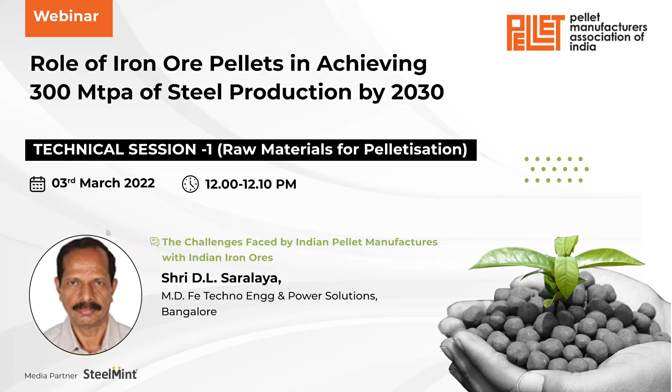Our next speaker is one of the top people from our pellets industry. He's a consultant, Mr. Saralaya. His name is Mr. D. L. Saralaya.

So I would really welcome if our friends from America, they continue to be with us, and we will be very, very delighted, in fact, and we will be very grateful. I know United States is one country, my daughter is in Denver also, that they don't like to talk after office hours about business. But Indians are different, and I am sure you will agree.

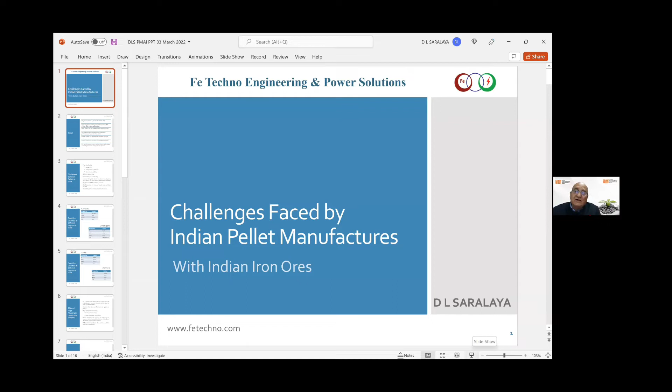So with these words, I will request our next speaker, an outstanding mechanical engineer called Mr. D. L. Saralaya. And Rishabh, I hope you can put Mr. Saralaya online so that he can come. He's there. I'll just say a few words because he is one of our oldest friends of Pellet Manufacturers Association. Very few people know that he has spent the entire lifetime with pellets. He's a mechanical engineer and also has a master's degree from Indian Institute of Science, Bangalore, which is the top institute for metallurgy in those days.

Mr. Saralaya joined the famous company, still there, Kudremukh Iron Ore Company Limited. It is the only public sector undertaking in the pellets industry. And he's an entrepreneur. He's heading a company called Fe Techno Engineering, and he is also a consultant for new pellet plants coming up in India. I saw a question by somebody about what new pellet plants are coming in India. I can't answer it right now, but I think Saralaya sir will be able to answer. Over to you, Mr. D. L. Saralaya.

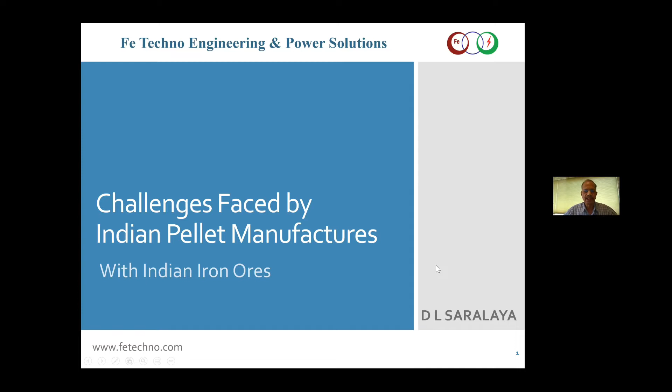Thank you. Good afternoon. Can you share the screen? Yeah, he's there. Are you able to see the screen? Yes. Go ahead. Okay, thank you.

So I will be talking regarding the challenges faced by the Indian pellet manufacturers. So the target is to produce 300 million tons of steel by 2030. Accordingly, iron bearing material requires at least a minimum of 450 million tons. Balance can be made up by scrap and other materials. But all this will be pellet, sinter, and good quality ore. Good quality ore is not available now much. That's why the blast furnace people totally depend on pellet and sinter.

Indian blast furnaces are not using much of pellets now, maybe around 20%, 30%. They can use up to 50% pellets with the existing blast furnace. More than that, if the pellets have to be used, they have to modify the blast furnace design. So what I feel is we should be able to produce 300 million tons of pellets maybe by 2030. Why pellets? Why not sinter? Because sinter is more detrimental to the environment, whereas pellets are much better when we consider the environmental impact.

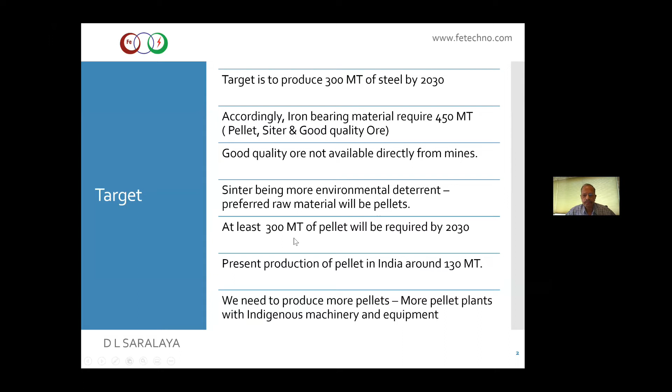So far all the big pellet plants import the machinery and the technology, either from Metso or from Outotec or from Uralmash. But I think we should develop in India itself, the Make in India concept. We should have pellet plants which are made totally in India. And of the new pellet plants coming up now, one is coming up in Hospet, jointly by Fomento and BKG group, that is 3.2 million tons.

Other pellet plants planned are by Tata Steel. They are planning one more pellet plant, maybe in Kalinganagar. Jindal Stainless is planning one pellet plant in Kalinganagar. Plus other plants like 1.2 million ton plants by Atta Group and a 2.4 million ton pellet plant by MSPL, that is Baldota Group. So many other plants are in the pipeline. One plant is coming up in Chennai by one pellet plant group. There are many people trying to put up pellet plants. We don't know how many will come.

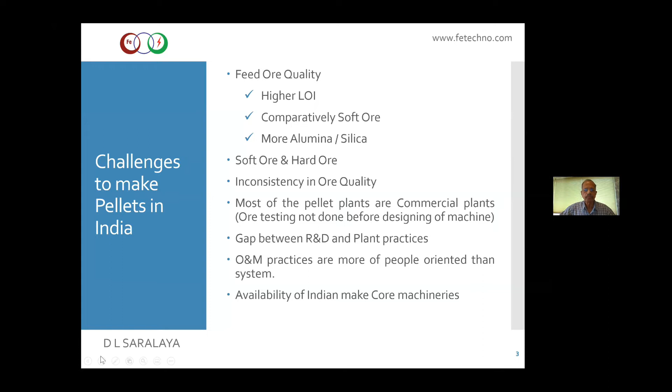So if you see the different Karnataka, Chhattisgarh, then Orissa and Jharkhand, all these ores, there is some difference, but mostly all are having very high alumina, more than 2.5%, 3% alumina. Sometimes it goes up to 4% also. So this alumina has to be reduced. And also the iron content in the ore is mostly now 55%, 56%. We have got a lot of LOI in the iron ore.

So one possibility is going for reduction roasting, where we can get a better quality product, whether LOI or alumina, everything can be reduced by going for this. I think IMMT Bhubaneswar has worked on this. I think Dr. Biswal will explain more on this, and he's the right person to tell how to go about this.

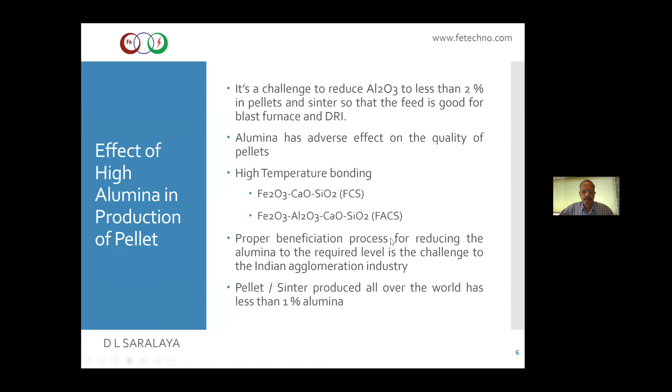And all our plants, if you see, they are all merchant plants. Most of the time, iron ore testing is not done, and nothing is based on the actual type of ore what we are having. Everybody is putting up the plant, maybe 1.2 million ton plant. Everything is similar. Like you take a 63 meter length, everybody is having the same furnace. So different ores, then we face problems. So some operating practices, some procedures, everybody wants higher production. So most of the time we don't care about the quality of the pellets.

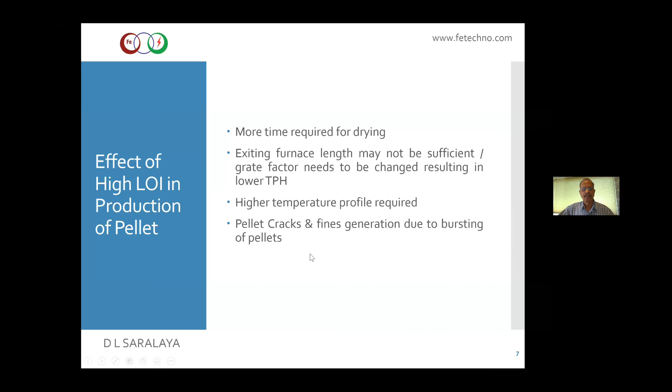But yeah, we have to see how to overcome all these problems. How can we improve the properties of the product? How the operating and maintenance people can have a good practice of operating and maintenance, so that even if there is pressure from the management, we should insist that we can make good pellets only this much. More tonnage will really hamper the production. Not only that, it will hamper the equipment itself. I have seen pellet plants having bent pellet cars where they cannot run the next day. So you have to be careful when you are operating the plant.

So we have to give more time when the LOI is more. The drying and preheating time has to be more. So your production has to come down if it is designed on a normal operating way. The pellets must be dried, cooked slowly in the preheating zone and the drying zone. So whenever you try to move the machine faster, this high LOI creates problem and the pellets start breaking down and becoming fines.

And if you don't take care, then everything will be bad. The pellet cars get blocked. Then you don't get the proper properties. You don't get the CCS and other properties. So we should take care. We should see that depending on the LOI, depending on the alumina content, what is the best operation, how to make good pellets even with the bad material. That also we should learn.

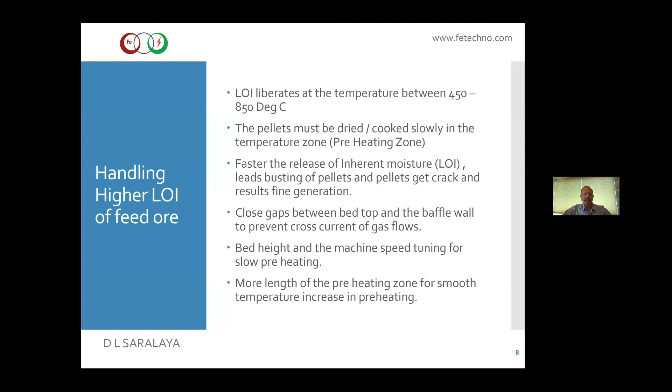And other problem with our Indian iron ore is the grinding system. Normally in the soft ore, when we try to grind, you generate a lot of microfines, that is minus 10 micron. At the same time, we will be having plus 150 micron material, which is not desired for making pellets. So how to do a good beneficiation so that we control at least this minus 10 micron and plus 150 micron. This has to be controlled. For that, you have to generate a proper beneficiation procedure.

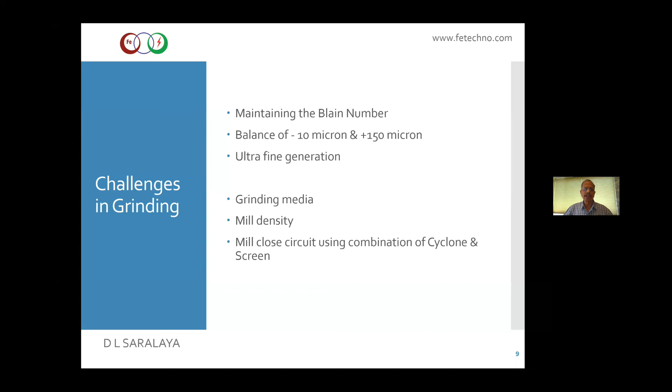Maybe you have to use a combination of cyclones plus Derrick screen, where you reduce the generation of ultrafines. You get a good product, at least as far as you can maintain proper permeability, proper porosity in the pellets, so that your cooking will be all right. You will not have any higher FeO content in the pellet, which is detrimental for the process. And even in the grinding also, you have to maintain proper mill density with the combination of cyclone and screen. All this is one system, what you have seen.

The other problem is the filter cake moisture you get when you filter this type of material, very high minus 10 micron. You cannot control the moisture, so it goes to 11%, sometimes 11.5%. So it becomes very difficult to make good pellets with this. And also with this iron ore, sometimes you get a lot of floating material in that, low density silica material, alumina material, which can pass the mill.

If you maintain slightly lower density in the mill, all this material will pass and go to the cyclone, they block the cyclone and they go to the overflow. Then they create problems in the thickener, create problems in the filter, it gets damaged. All these things we have to take care. The operating and maintenance people have to learn all this and take care of all this.

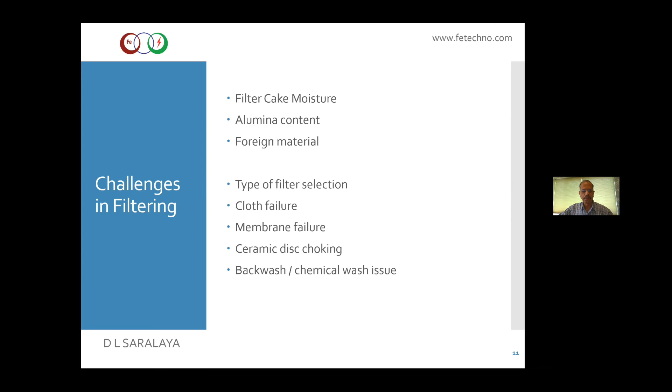And the filter selection also, whether you go for a pressure filter or a membrane type of filter, or a ceramic disc filter or a disc filter, you should be very careful even in selection of filters, selection of procedure. One solution, suppose you say we cannot control the moisture and have to get the material with slightly higher moisture: the combination of dry and wet grinding, maybe a small dry grinding system with a better wet grinding system, can solve the problem of at least balling.

Otherwise, in the case of balling, you get plastic balls, D-shaped balls, which will not be properly fired, which will have uneven shapes, and will not have good looks and good properties. So the operating and maintenance people should have proper understanding of the process, the proper equipment and operating procedures. The furnace feed should be evenly distributed. You cannot have ups and downs in the furnace, because the furnace can do the work to a limited extent. So 50% of the work has to be done before feeding it to the furnace.

Take care with the burner operating procedure: you cannot have very high fuel at some point and no fuel at other areas. You have to take care of all the things. And you have to keep proper watch on the pressures of the hood, pressures in the wind boxes, because it also indicates whether you are operating properly or not. What happens if the pressure goes high? What happens if the pressure goes very low? All this system has to be studied and taken care of. So this is very critical for the operating and maintenance people.

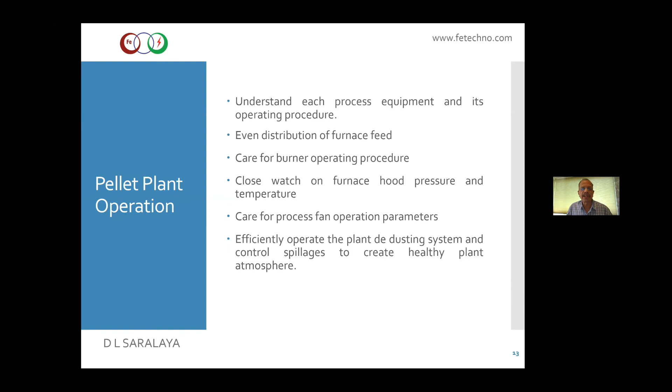So these are some of the things which the operating and maintenance people should take care of: disc, bed and scraper, furnace seals, pallet car, grate bar, refractory, roller screen gap, drive and discharge alignment, lubrication system. All these things have to be taken care of.

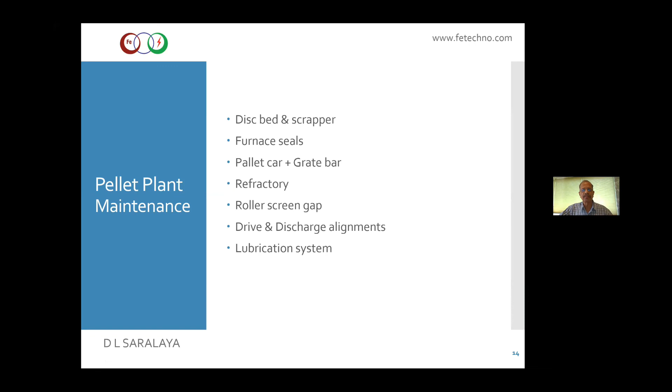The other problem in most of the plants is the approach for the operating and maintenance people. There should be a proper approach when we design the plant. This comes at the design stage itself. In designing the plant, we should make sure the operators and maintenance people are able to go to each and every area and check the area. If you don't do this, people don't go to the areas, they don't check, then there is a lot of spillage which you cannot control, and it creates problems, creates accidents. All these things should be taken care of.

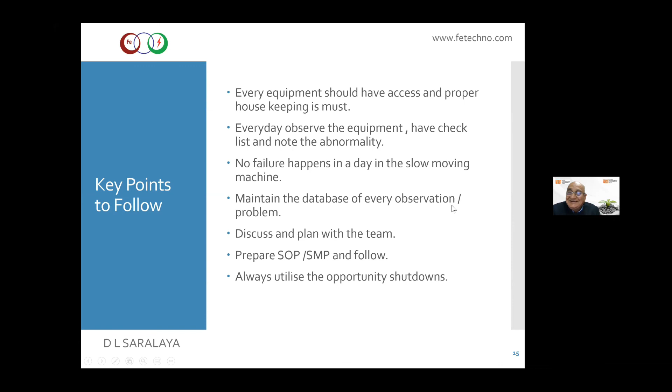Mr. Saralaya, if you can wind up. Yeah, if you can wind up and then we can... Oh, you're already there. Good. Thank you, sir. Thank you very much. Sorry to interrupt you, but thank you, Mr.

Saralaya. He has a lifetime of experience, and I think those slides which you showed are extremely useful. Every state has different mineralogy, and I think you are the first speaker to tell about the different states. Thank you very much.